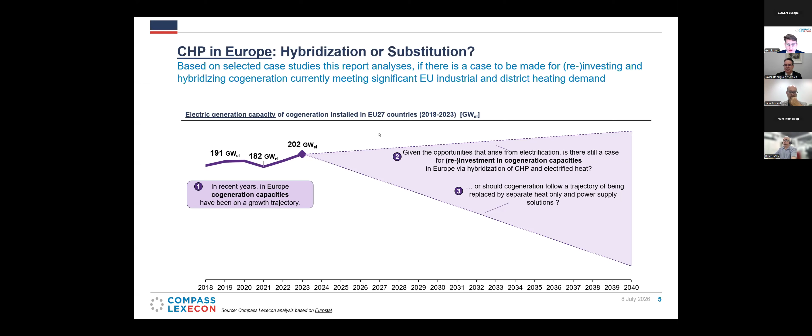Is always whether this can be replaced and electrified, and the question or the proposal by Cogen and the cogeneration industry is to rather hybridize these cogeneration units and work in tandem with electrified heat instead of substitution. And that's what we are analyzing here in this study.

So we're trying to provide evidence on the role of cogeneration in the European energy sector against both the decarbonization targets that are ever increasing, but also against the realities of the framework conditions that we see in Europe, where we have an ongoing and not completed energy sector transition, and where we also have the need for end users, and in this case industrial players, to remain competitive in what they're doing.

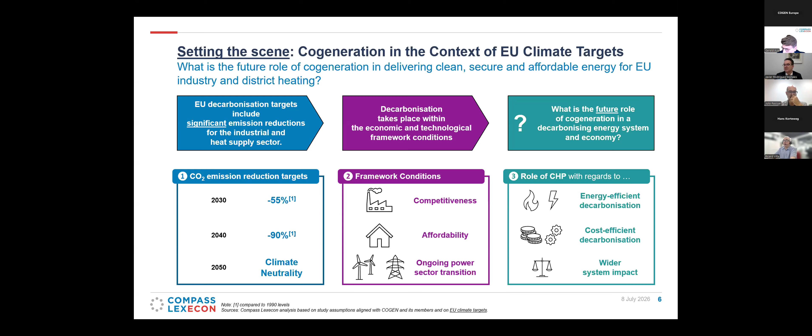In providing this evidence, we've selected and discussed with Cogen a study setup that analyzes dedicated use cases. We've selected some use cases across Europe, and in all those use cases we have modeled 2 scenarios or 2 setups.

One that uses cogeneration and hybridizes this with electrified heat, and another setup for the same use case that does not include cogeneration, and thereby we're able to show what the role of cogeneration is and what the advantages of cogeneration are.

And we do this across 5 dimensions that we see here to the right, and it will to some extent guide the remainder of my presentation.

So we look to what extent these cogeneration technologies can complement electrified heat. We look at the role of cogeneration in achieving energy efficiency, how cogeneration can contribute to decarbonizing the energy sector, how in this industrial use case competitiveness can be supported by the usage of cogeneration, and we also look into the wider system impact of cogeneration by providing particularly ancillary services to support the wider grid.

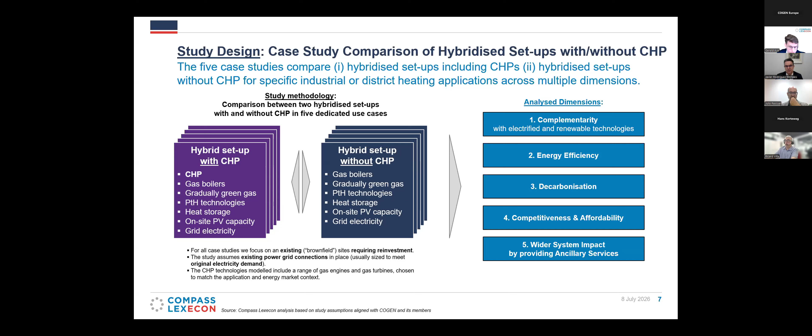We have, as mentioned in this study, looked into 5 use cases. These 5 use cases cover a broad range of both industrial and district heating applications, and they also cover various European geographies that are to some extent the endpoints of the energy sector transition as we see it in Europe at the moment.

So we have already quite advanced countries like Spain, where we have a lot of renewable electricity already at the moment, a lot of intermittent renewable generation like solar and wind. And we have other countries that are relatively at the start, like Poland and Romania, where we still have a lot of fossil fuels in the energy mix.

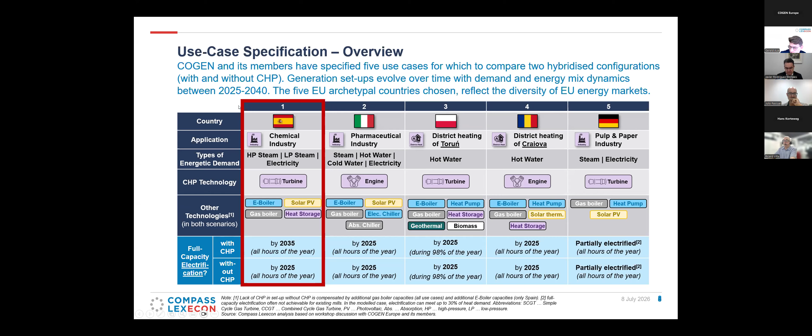By looking into those 5 use cases and 5 case studies, we can cover a bit the breadth of the energy transition that we see at the moment, and provide some broader insights on the usage of cogeneration within the evolving energy system. We will look into the Spanish use case in a bit more detail in a moment, just to give a glimpse on how we did the modeling.

So we analyzed the use cases not in a moment view, but rather over the 15 years until 2040. So we covered the entire transition from today until 2040. And we do this by looking into the impact of cogeneration in a certain country within the European energy system. We look into the evolution both in demand and generation. So we take fully account that the energy sector transition is continuing and ongoing.

We also take into account that the commodity prices, and especially the carbon price, will change over time. And we model this in hourly granularity to also take into account the short-term flexibility that cogeneration technologies provide, but also the flexibility needs that the energy system does have on also shorter-term granularities.

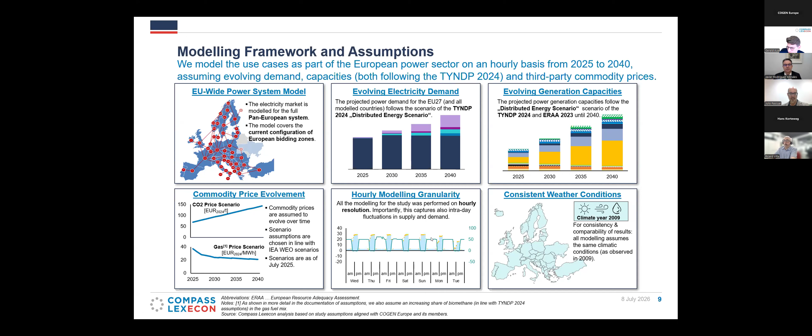And we do this taking into account the weather conditions that we see around us, so the availability of a lot of renewable generation at some points in time, and the lack of renewable generation in other points in time. So that's the framework. In the full study, there's a much more detailed description of the modeling approach that we use, but that's just to give you a few of the key elements of how we modeled the use cases.

So now a quick view into the Spanish use case without going into too many details, just to flag what we have done here. We look into a Spanish chemical industry player that currently uses cogeneration and that has a need for steam, electricity, and covers them currently to a very significant extent by using a simple cycle gas turbine.

And the setup that we've looked into then moves toward hybridizing this setup. So we have, again, the simple cycle gas turbine. We also have the backup gas boilers that were there in the past, but we over time hybridize the heat generation ability by including an e-boiler that can make use of electricity both off the grid and from some limited solar PV on-site generation. And we also include some heat storage, and thereby we allow an interplay between the gas turbine and the electric heat generation.

In the second setup, where we basically restrict the options available to the industrial end user, we remove the simple cycle gas turbine and then take a look how this would play out. So the industrial player would be limited to basically the usage of an e-boiler and the backup and usage of a natural gas boiler in case of non-availability or non-commercial viability of electrified heat.

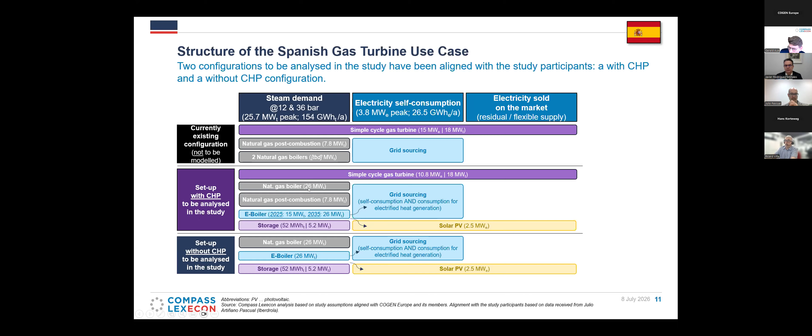Also, maybe to flag, when we look in the heat demand or in the energy demand of the end user, we have both low pressure steam demand, high pressure steam demand, and we have a relatively flat demand profile. So we have a process industrial player here that needs heat and steam and also electricity more or less throughout the year, with some very brief interruptions over time. But this is a relatively baseload application here. And we can flexibilize this to some extent by using the heat storage, but overall there's quite significant need for baseload supply here.

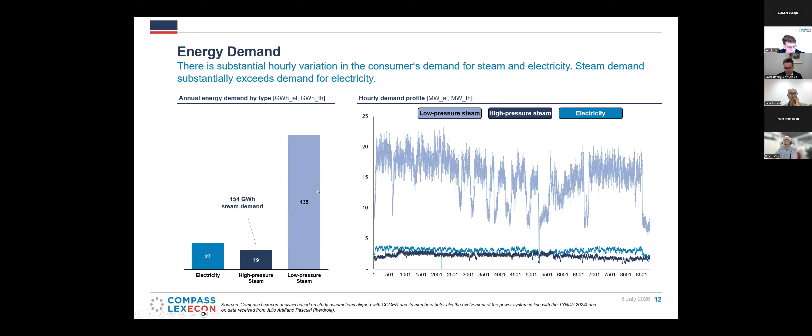But just to show, we analyzed the complementarity of CHPs with electrified heat, both on the short run and in the long run flexibility perspective. So how the availability of CHPs can complement the interruptible or intermittent availability of renewable electricity. We also show the impact of CHPs during times of high energy prices, which are set to remain also in future.

We also, in regards of the complementarity, look into the grid connection queue issue, which we understand from the discussion with the Spanish colleagues is a very significant issue in Spain, and to some extent hinders electrification.

In terms of energy efficiency and decarbonization, we basically show that by using CHPs, the use of direct and indirect fossil fuels and the connected emissions can be reduced. So we look into both the emissions that are on site from burning gas, but also the emissions in the energy system, in the electricity system upstream, to provide electricity also when there's no renewable generation. And over a large time of the analyzed horizon, the CHP setup performs better in both dimensions.

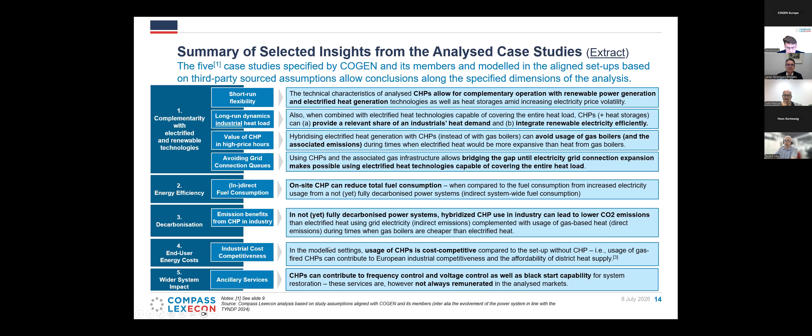And we look into the energy cost for the end user, where we can show that using CHPs is overall more competitive than using pure electrified heat or electrified heat backed up with gas boilers. Finally, there's a wider system impact that we're not going to cover in much detail today, but by having a gas turbine in a CHP configuration, there's also the ability to provide some ancillary services and wider system impact.

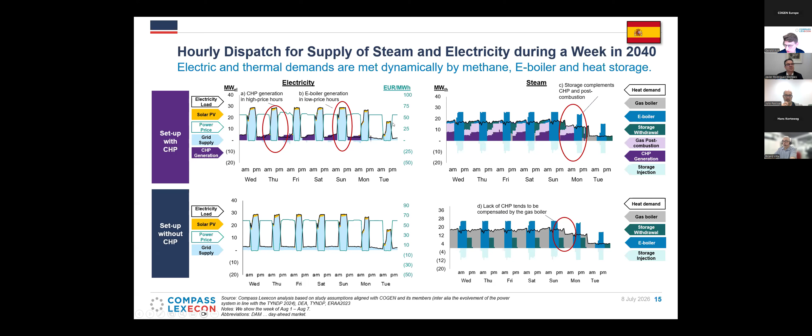then there is a lot of grid-sourced electricity, where basically the e-boiler runs on cheap and almost free electricity. And when this cheap electricity is not available, there's the heat provision by the CHP and natural gas post-combustion burner plus the heat storage. So we basically have a complement of all technologies that switches quite quickly over time to meet the heat demand. And when we have excess heat, there's also the ability to store it and use it later. So that's a snapshot of a week in 2040.

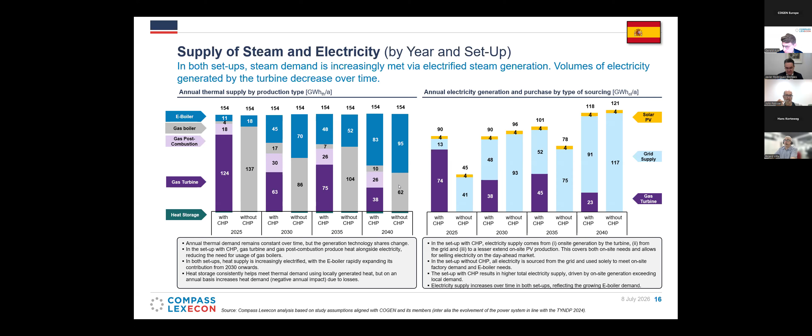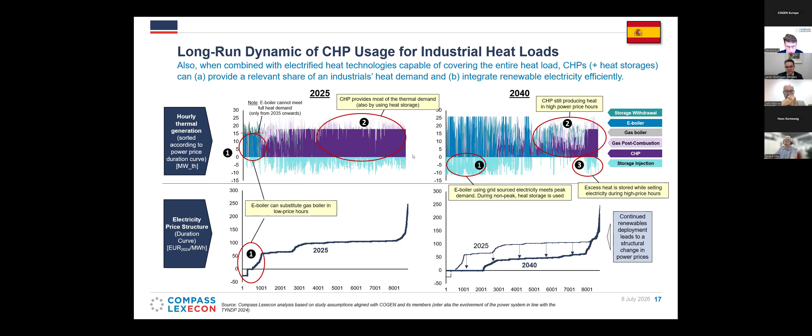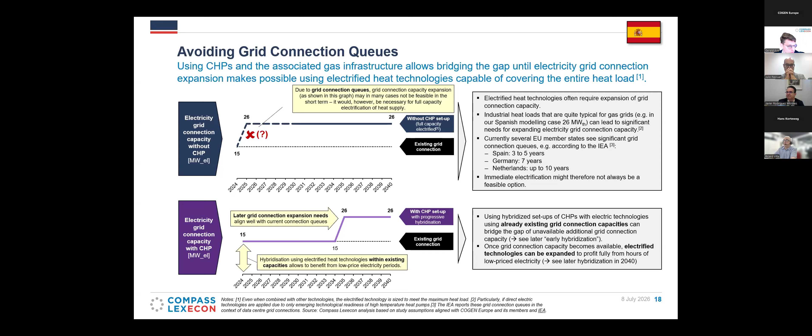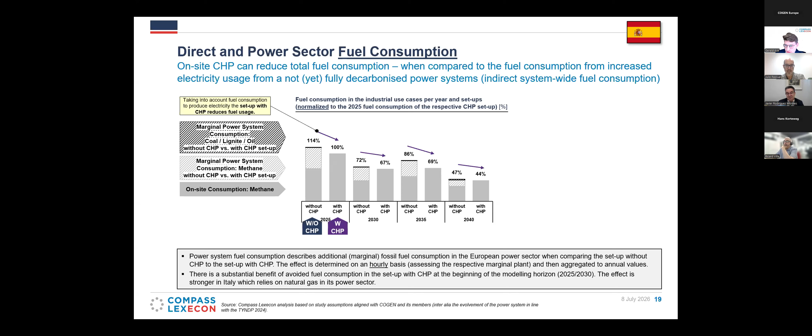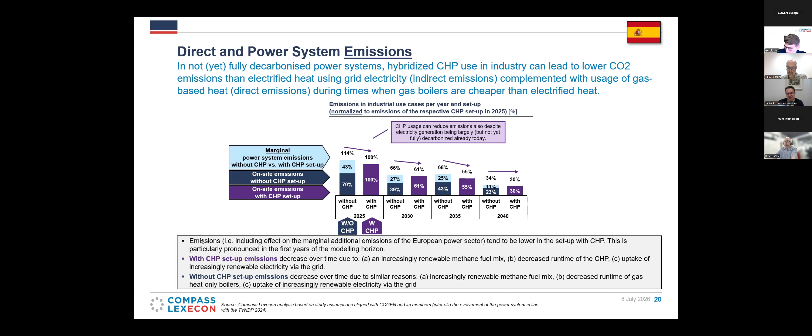Last aspect is the cost side of things. So having this model in place, looking over 15 years, we were able to also analyze the cost and revenue side from these two setups. So again, we have in purple here the CHP setup, where we have higher upfront investments in the setup, and then over time have both running cost, so fuel cost and operating cost, but also do have some revenues from selling electricity on the market when it's in excess production on site. And we compare this with a non-CHP setup, where we do have basically investments and running costs as well, but do not have any revenues from selling electricity.

And when we compare this over the 15 years and provide what we call levelized cost of energy to both meet the electricity and heat demand of the end user, then we see that under the assumptions that we've taken here and that we've outlined in the study and presented very briefly also here, that the CHP actually leads to lower levelized cost of energy. So again, meeting the end user's energy demand is more competitive by using the CHP, despite there being a bit of an increase in the initial capex, which is also to be expected. And we note that this is also to some extent a conservative assessment, because we do not take into account revenues by the end user that he could make from using his CHP to also provide and monetize ancillary services.

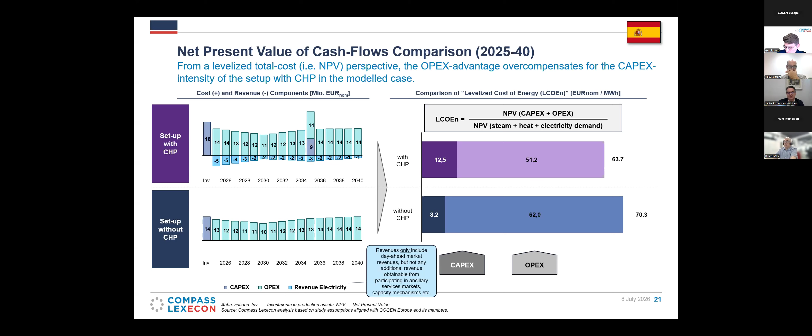So that's the overview over some insights. And then just to summarize, we've looked in the whole study into those 5 use cases. The one that we've discussed here is the chemical industry use case in Spain. And from this study, we basically can show that in the setups, the use of CHP can provide some benefit in the dimensions that we've looked into. So we can provide some support, some impact on the complementarity. We can avoid the usage of electricity at high prices. We can reduce the impact of grid connection queues. We can use energy more efficiently.

We can use methane and gases more efficiently than without CHP. We can thereby contribute to decarbonization. We can provide a solution that's more cost competitive than solutions without CHPs in place. And we can provide a wider system impact because we have rotating generation equipment that can provide ancillary services to the system. And in many jurisdictions, most of those services are also a way to additionally monetize and provide an additional revenue stream to the system.

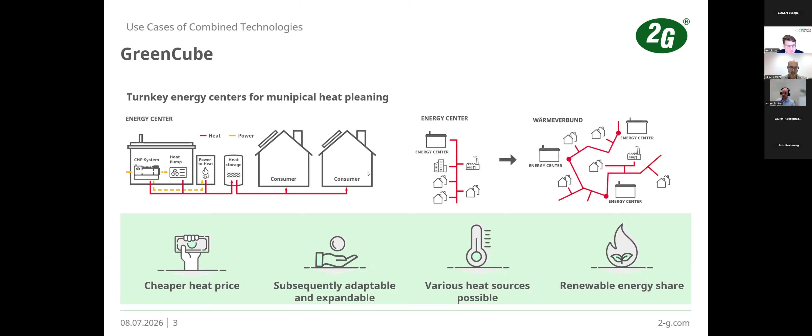Now, how is that typically applied? This is a residential commercial scale approach. Just very briefly, 50 kilowatt small scale cogen system with 100 kilowatt thermal output, which we then scale up to 260 kilowatt thermal output with an additional air-to-water heat pump that is either supplied by the cogen system or by the power grid, depending on the tariff, with an average operating time of 5,000 to 6,000 hours a year.

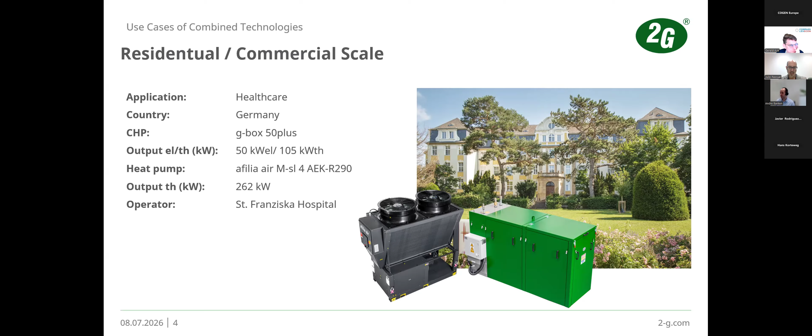But that's small scale. Looking a bit more in the industrial sector, this example here is from the food processing industry, not from chemical, but a similar setup. So demand for high temperature process heating, 24/7 energy demand, strong push for decarbonization, but also, as we say, high quantity, low margin business - so every cent of energy saved counts.

And what we basically did here is we provided a turnkey approach where we have a CHP unit with two different heat pumps, so an air-to-water and an air-to-air heat pump, in combination to boost further the supply temperature up to 100 degrees centigrade, including a buffer storage tank to essentially decouple

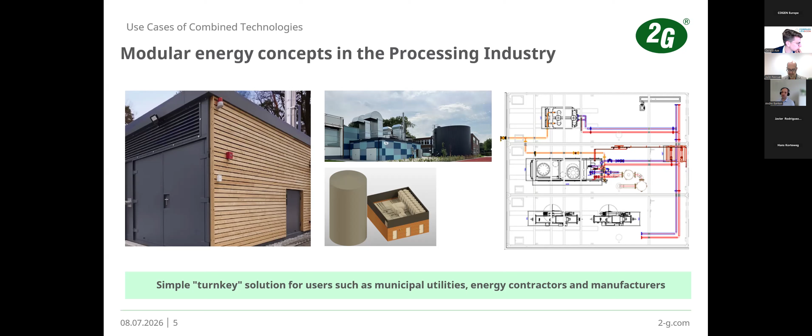generation from demand. So essentially, the CHP provides the electricity and high-grade heat when the demand profile or electrical price rewards it. The heat pump lifts the environmental or waste heat, as we call it, when electricity is relatively cheap and the CHP running time is constrained. The buffer storage essentially decouples these two from each other. The controller, or the customer control, manages the storage dispatch and grid interaction there, so that it's a fully flexible, integrated solution that tries to maximize the utilization of the energy tariff system.

On an industrial or even a utility scale, that's a similar setup here, a little bit bigger, more akin to what maybe a chemical plant might need or a pharmaceutical plant might need. That's 10 megawatt of cogen capacity, 5 million liters of thermal storage, 2.8 megawatt of heat pumps, so 4 air-to-air heat pumps in total. And this is connected with a 3-kilometer pipeline to a district heating network that not only provides residential heating, but also provides heat

also to industrial customers, including a nearby shipyard facility - the Meyer-Werft in Papenburg, some of you may know that. They're making luxury cruise liners. So this plant also takes over their heating supply.

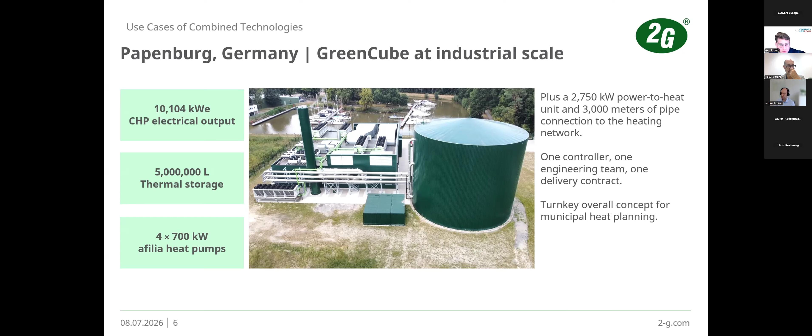Looking at it from a European context, from our point of view, we have several use cases here that we typically identify at the moment as sectors where there's strong demand. District heating, we already mentioned. Commercial property is also certainly a sector. In the manufacturing industry, definitely the push for process heating to 100 degrees centigrade, including waste heat recovery, is what people on the heat pump side are most interested in. At the same time, the CHP unit is capable of providing the electrical power for that process while the heat pump lifts the waste heat, especially looking at countries or territories where power supply by the grid is congested.

If we look at other countries, availability of power supply has become an issue. So the on-site generation in case of grid constraint by the CHP unit can be a big support for further electrification of the heating side by heat pumps for various applications, whether it's the biogas sector, industry, or object supply. It really depends which individual use case, which country, which territory, with which power tariff structure you're looking at. But typically, in almost all cases, there is a commercial use case to be made.

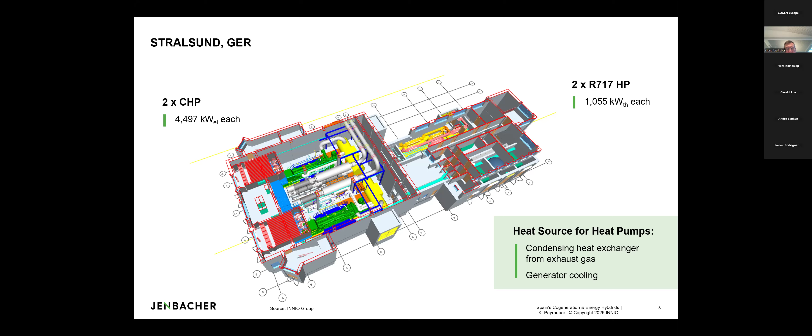But we have a solution to capture this cooling heat and use it as a heat source for the heat pump. The result is we have two engines with 4.5 megawatt each, producing more than 4.7 megawatt thermal energy - high temperature heat for district heating. With these heat pumps, we add another 1 megawatt of heat, increasing the total heat output to 5.8 megawatt per unit at 105 degrees Celsius district heating water.

We at Jenbacher also supply the SCR system and the heat exchanger to allow us to give performance and emission guarantees. The heat exchangers in the exhaust are a special arrangement with two heat exchangers plus one condensing heat exchanger, as I mentioned, to cool down the exhaust well below 50 degrees Celsius. That allows us to run the engine still at very high electrical efficiency of 46%.

And the total efficiency we can achieve in combination with the heat pump is almost 95%. The COP of the heat pump here is almost 6. This is because we are using the heat pump to use the waste heat at around 50 degrees Celsius and pump it up to 60, 70 degrees Celsius, implementing it into the whole water steam cycle or water cycle to optimize and achieve the 105 degrees Celsius district heating temperature.

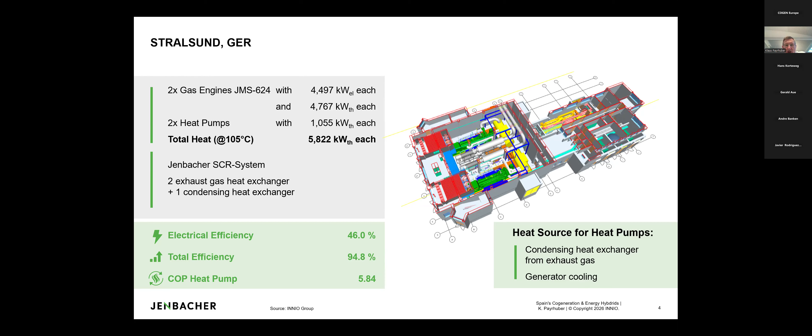Going forward, how do we see the future of CHP and the integration of heat pumps? Now we are working more and more with high temperature heat pumps from Heaten. Heaten is a company specializing in piston compressor solutions, producing high temperature heat pumps with 2 stages, depending on what temperatures are available and what temperatures are required on the heat sink.

So they do 1 stage, 2 stage, plus the second stage could be a mechanical vapor recompression solution to allow increasing the steam pressure to what is required - typically low pressure steam, 6, 7, 8 bar, which fits very well with heat pump solutions. Temperatures all the way up to 200 degrees Celsius. 200 degrees Celsius would require higher steam pressure, already up to 15 bar, something like that.

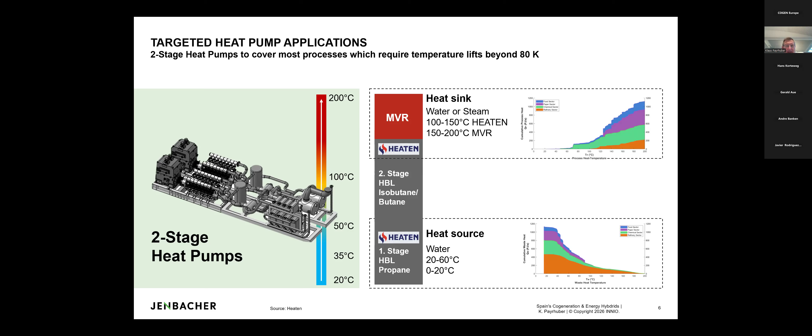So it really depends on the heat source, what is available, what temperature level is available, and what is required on the temperature - is it heat, hot water, or steam. Depending on this, the configuration is 1-stage, 2-stage, including mechanical vapor recompression. And of course, depending on this, the refrigerant is selected to achieve the best solution, the highest COP.

One example of how this could look is shown here. This is an example for paper mill applications. Here we're using a biogas from a paper mill, from a waste, generating biogas in the paper mill itself. This biogas is available for the engine, running more or less a biogas engine. The example here is a 1.3 megawatt engine. The engine exhaust is used to produce steam for the paper mill, and here we're producing 1.3 tons at 5.4 bar. This is the steam we can typically produce with the engine exhaust gas.

But now, in this case, we are adding a second steam boiler at 1.4 bar, and the waste heat, the cooling heat from the engine, seen here on heat exchangers 2, 3 and 4, is used as a heat source for the heat pump, that's the yellow circle in the middle. The heat pump then produces low pressure steam at 1.4 bar, with a result of 1.9 tons. Then we use a compressor to increase the steam pressure to 5.4 bar. This concept allows us to increase steam production by another 2.4 tons per hour. As a result, instead of 1.3 tons, we have 1.3 plus 2.4, in total 3.7 tons per hour of steam production. This is a significant increase, typically what's required for industrial applications.

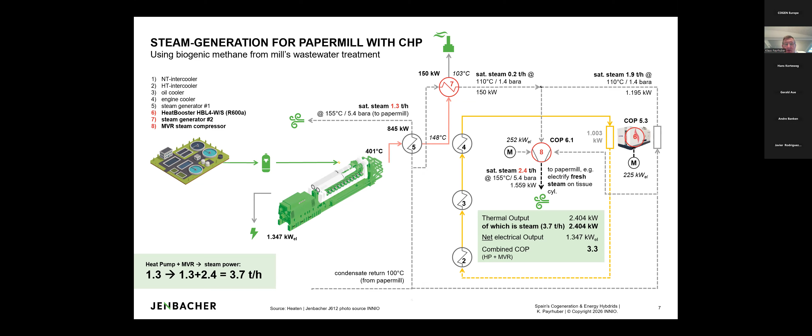Also, what we see in the future in terms of flexibility with CHP and heat pumps is shown here. In order to maximize heat output using gaseous fuels—natural gas at the beginning, potentially biomethane or hydrogen in the future—the best solution is to use this gas in a CHP to produce power and heat. Because if you use gas in a CHP, you're producing electricity, and this electricity can be used to run a heat pump, depending on COP between 2 and 5. With a high COP, you can maximize heat output to 270% based on fuel input. On the left-hand side, you see an engine CHP with high electrical efficiency—that's the advantage compared to other solutions like micro gas turbines, which typically have lower electrical efficiency. The worst option is to just burn the gas in a boiler, because then the maximum heat output is around 100%. You can do condensing and go a little above 100%, but that's all. The combination with a heat pump allows much more heat output based on the fuel input.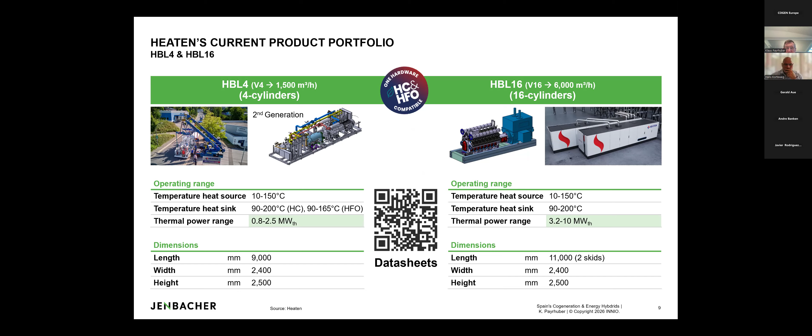That's what I have for this combination of CHP and heat pumps. Thank you very much for your attention, and happy to answer any questions.

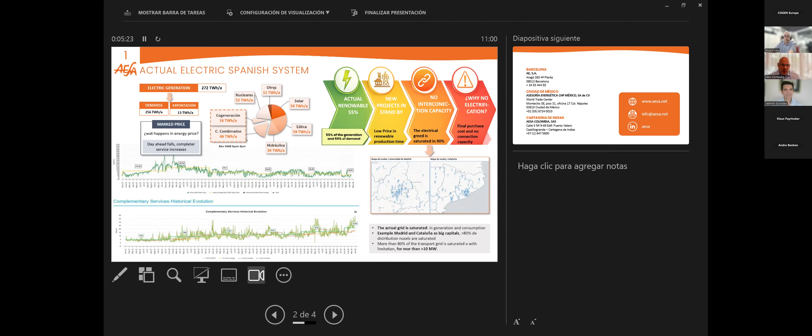Good morning, everyone. I'm going to share my screen. Okay. Yes, okay. I think that I'm... yes, I'm sharing my screen. Okay.

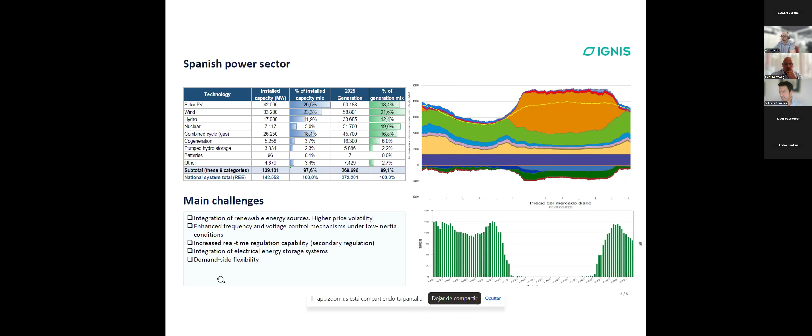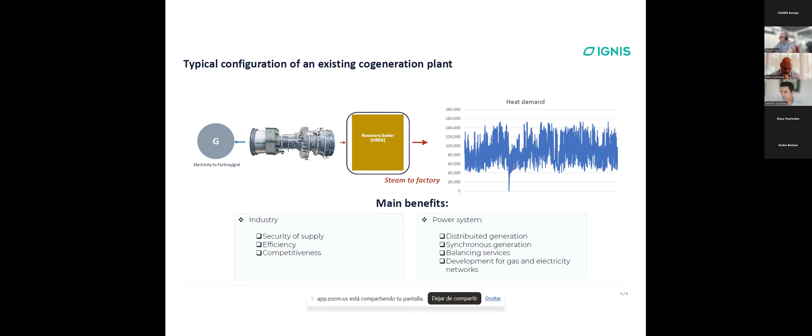For our view, how to hybridize cogeneration with power-to-heat solutions—mainly this can be an e-boiler, heat pumps, or even electric air heating with resistance.

In the typical setup, the cogeneration plant stops when the break-even price is over the market price—that is, when the market price is lower than the break-even. In this case, the cogeneration plant has to stop in order to keep competitiveness during those hours. When the cogeneration is stopped, the heat demand can be covered by the electrical boiler or a heat pump.

With the heat pumps, in the violin plot we can see how the prices of electricity are distributed, shown in green, and also on the right side when the cogeneration plant is running, shown in the brown area. When the cogeneration is stopped due to low prices, the demand is covered by the electrical e-boiler or the heat pumps.

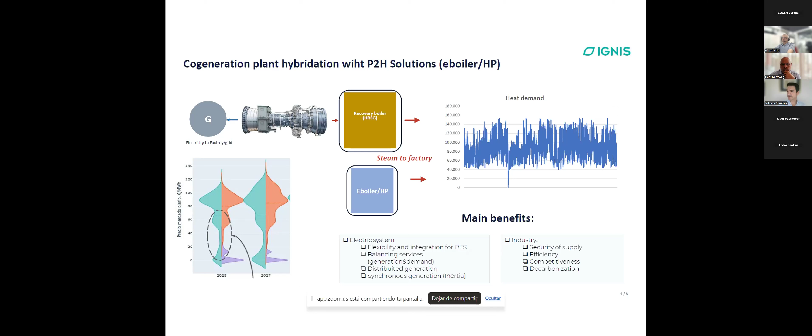Another way to hybridize the plant with a power-to-heat solution is by using thermal storage, where the exhaust gases of the engines are stored in a thermal battery, which then supplies the heat demand. The operational regime is the same as in the previous slide: the cogeneration stops when the pool price is lower than the break-even, we disconnect the cogeneration plant from the heat, and continue covering the demand by discharging the thermal storage. The main benefit is the same.

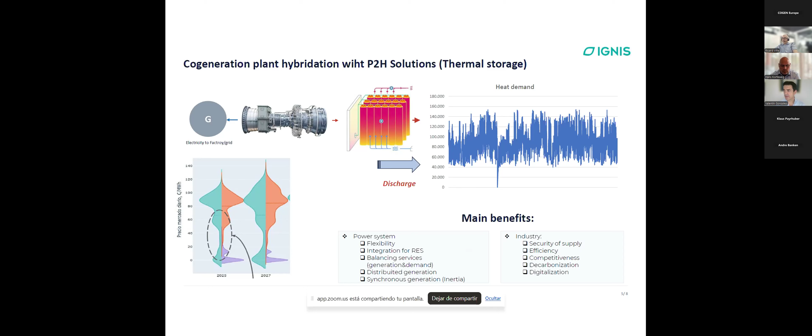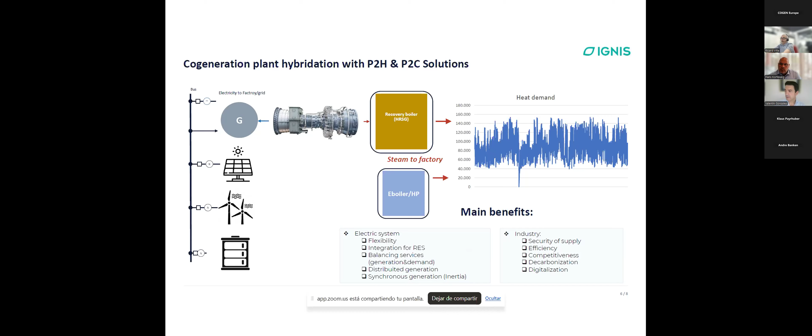It's a way to adapt with the thermal storage to the heat demand. And the last option is for those cogenerations that reduce the electrical capacity. We have access to the grid that is open to be used with other technologies, such as solar PV, wind in case there is a resource near, and battery. And on the heat side, we can use the same technologies as power-to-heat solutions.

To summarize, in the last days, the auction scheme was released by the Energy Ministry. With this framework, it's expected that we can extend the regulatory life for the cogeneration sector, allowing us to incorporate more efficient technologies, making the sector more competitive, more decarbonized, more resilient, and less dependent on the global energy markets.

And for the new configuration, the plant will be a tailor-made solution for each industry. It's going to depend on the demand, the profile, but also the characteristics, the remaining useful life, and for the current assets, the efficiency improvement, and the decarbonization road of the industry.